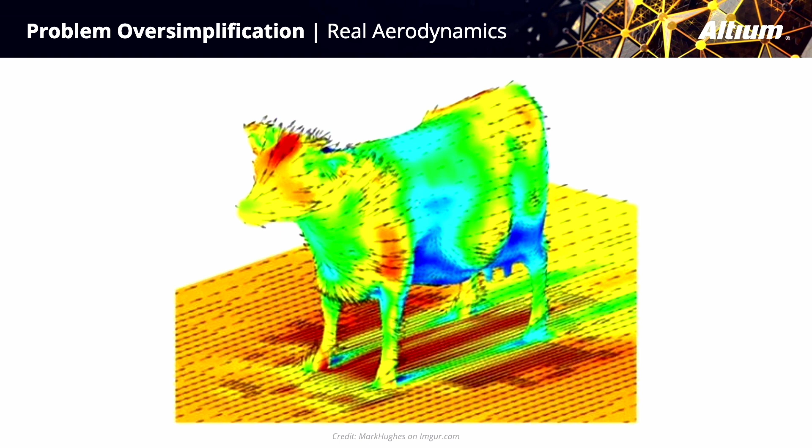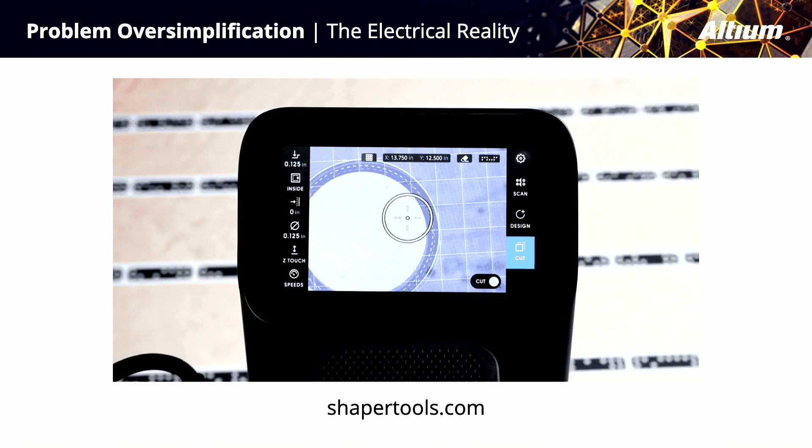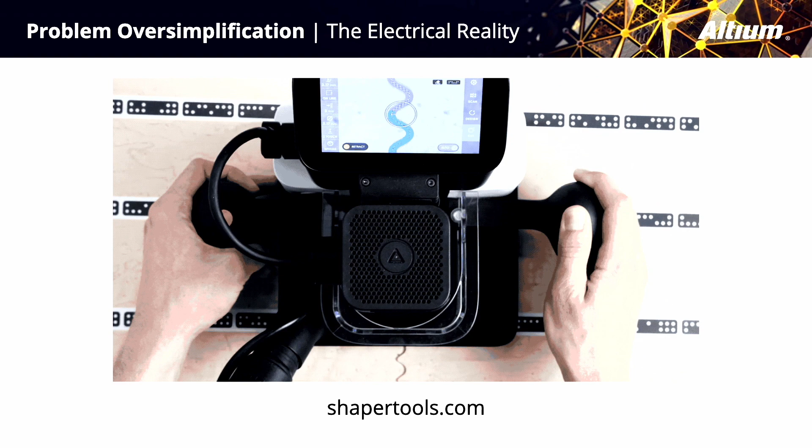So quick detour to explain what the hell Shaper Origin is, for those of you who don't know. Shaper Origin is a handheld rotary cutting tool, a robotic handheld power tool, that basically uses computer vision to augment your abilities as a human to cut something. You load in a digital design file. You do the coarse movements. The tool compensates for your movements in real time and keeps you on track on your design.

So if I want to cut a perfectly straight line and I'm moving like this, I'm exaggerating, but if I'm moving like this, the tool's spindle is moving in the exact opposite direction at the same speed to ensure that the resulting cut path is perfectly straight, giving you a machine quality cut with a handheld power tool. So I'll show a quick video of some of our customers using this tool, because I'm going to continue using Origin as an example of a holistically designed product from an electrical engineering perspective. So it's useful to have this context. And just because I'm really proud of it, and it's a really cool tool that people do really cool stuff with.

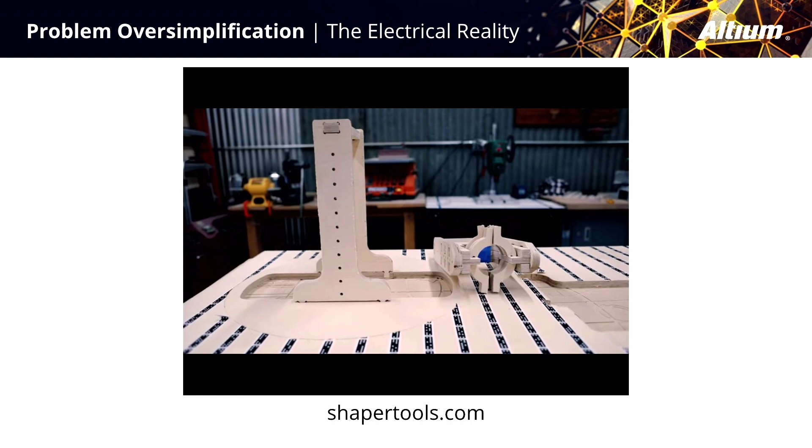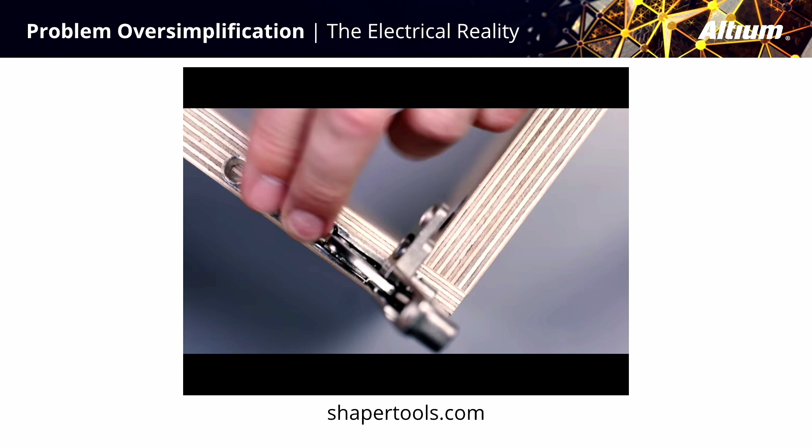So this product has taught me a lot about predicting issues before they happen, and developing an electronic design process that allows us, Shaper, to move quickly as a company. When we announced Origin at the end of 2016, saying we would ship it in a year, we did that. Unlike many other crowd-funded hardware products, we delivered on time in a tight timeline with a very complicated product. And our ability to do that was made possible largely by the things that I'll continue to discuss through the rest of this presentation.

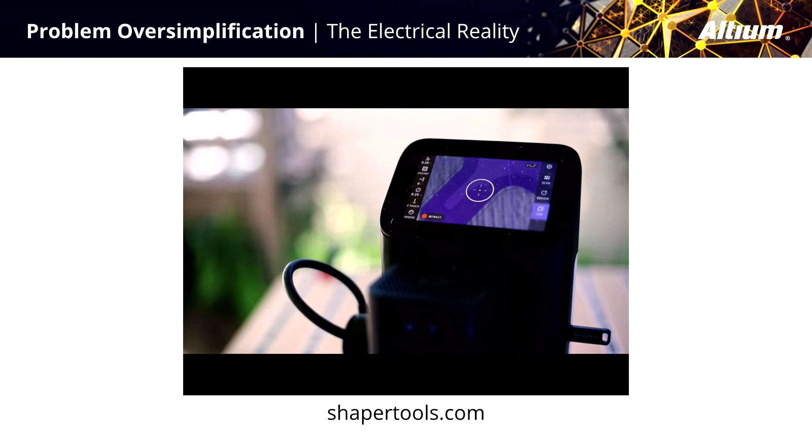So as of January of this year, Shaper has been acquired by TTS, which is parent company to Festool, a German company. How many of you have heard of Festool? Show of hands. OK. Great. It's a different answer that I get when I'm in the US, because their presence is not as large in the US. But we're really proud to be part of that family now. And we've actually already been working with them for years because they designed or co-designed the spindle motor that sits inside of Origin with us before that acquisition happened. So they bring decades of experience building really great power tools, and we bring experience with computer vision and software systems.

So, okay, we agree that designing PCBs is complicated. The simplified versions that we might use don't always address all the corner cases that we might encounter in the real world. So let's talk about designing them as part of a larger system. How do we know what trade-offs to make? What are the job functions that are tangential to us as electrical engineers, and how do those impact the decisions that we make as electrical engineers or PCB designers?

So for me, I kind of started to learn about the importance of these tangential roles that surrounded me in my engineering position when I was at Google. But this didn't completely happen to me until I was at Shaper, the 6th or 7th employee at the company. This was about 4 years ago now.

And the reality was, it wasn't that I had to learn how to work with software engineers or the people responsible for our manufacturing test or our factory fixtures or the people responsible for understanding how we were going to sell this to end customers. Those people didn't exist. So I was doing them, or my other 5 or 6 coworkers were doing them.

The industrial designer might say, hey, that perfect rectangular metal box actually has to be half plastic. The mechanical designer might say, this product has to survive sawdust. The person in charge of your factory programming fixtures might say, we have to be able to calibrate that system effectively. The person responsible for your end customer story and how you're going to market this product says it needs to work seamlessly with, in our case, ShaperHub, which is our cloud infrastructure. OK, so this thing needs to have wireless connectivity.

Cool. The person responsible for design for manufacture, design for test, design for assembly would say, we want to 100% test all the sub-assemblies so that when they get to final assembly, we already know that they're guaranteed to work. The person in charge of UI and UX design might say it needs to be beautiful and intuitive. Your embedded software team is going to say, we need to be able to debug this as we go. And when we get return units back from the field, we need to be able to get into them and understand what went wrong.

And your quality assurance people want to be able to measure the performance of the tool or whatever product it is that you're making and understand if it's working the way that you're marketing to your customers that it should be working.

So when I talk about PCBs in context, what I'm really talking about is understanding these roles that exist around you. And by the way, everyone else in your company has a similar diagram with them at the center of it. And it might be your job as someone who understands the holistic design process better than they might to encourage other people in your company to get an understanding of all these things that go around your job role so that they can have a better relationship with those people and understand their needs and requirements.

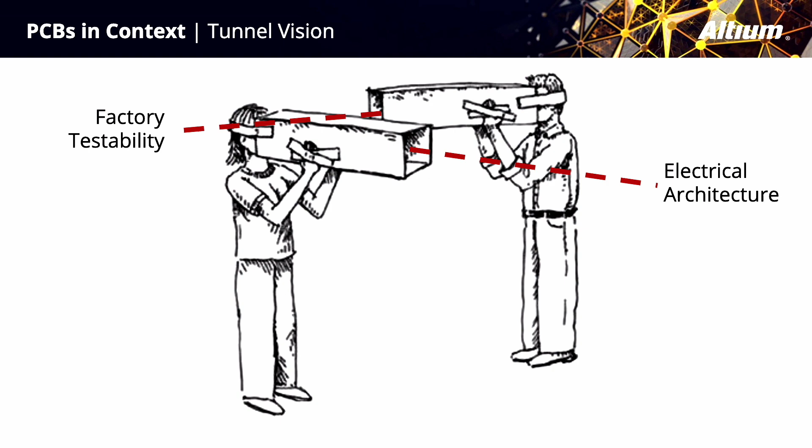So what happens when people over-focus, when they have this one-track mind, this tunnel vision, is they crisscross, and they end up in different places. And what happens is a year later, you end up with a product where the electrical engineer met his requirements for the product, the mechanical engineer met his requirements for the product, but guess what? Those two products are not compatible with each other, and now you can't ship this product. And so I call this tunnel vision, and basically it's you're getting so focused on your specific end goal that you're not considering the product as a whole.

So maybe you're thinking, it's not my responsibility. That's what the program manager is for, the product manager is for, to make sure all these different disparate needs stay on track, and that may be true to an extent. But I would posit to you that while you may have the best product manager or program manager in the world, they might not understand how a change in electrical architecture that you might make now could impact the way your factory fixtures are going to function 12 months from now. That's not in their job purview. They want to keep people on track, meeting deliverables, meeting timelines, and they may be very good at that. But you as an electrical engineer or a PCB designer should understand the roles around you and how the changes that you make are going to impact those roles.

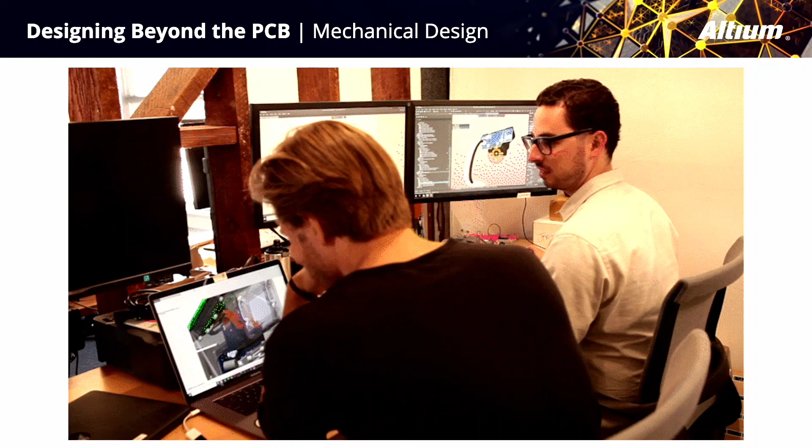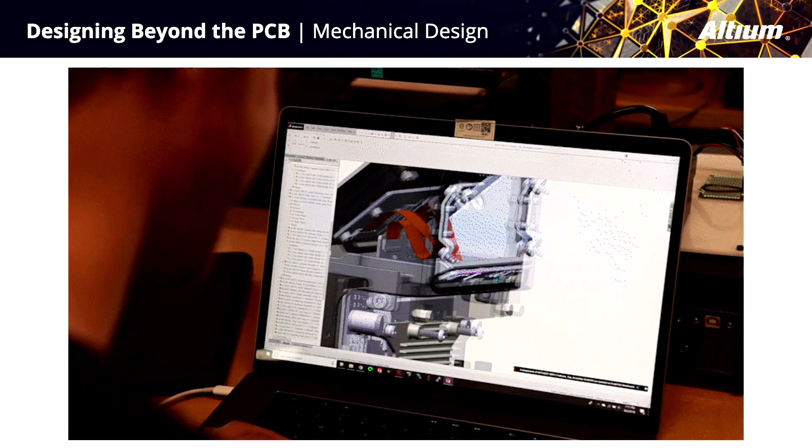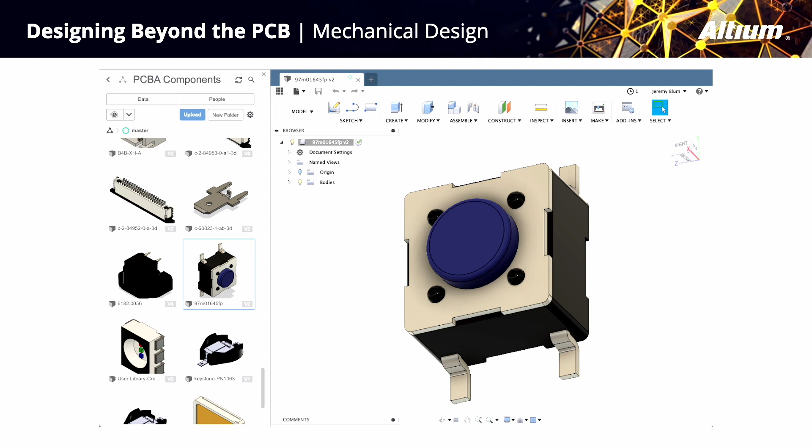Another important part of this process, I believe, is not saying you have to become a mechanical engineer, but understanding the things that impact their design process is incredibly useful. So this means a couple things. On one end of the spectrum, it can mean learning basic 3D CAD if you're not already familiar with some platform for doing that. I like to use Fusion 360 for modeling parts that I then import into Altium.

Just gives me a sense of kind of what their workflow looks like, even if I'm not doing the mainline mechanical engineering design of the whole product. It gives me a sense of what they go through in designing something.

The other part of that is understanding the processes and tolerances that impact them. So that means understanding when they say, we're going to extrude this part, or we're going to cast this part, or we're going to 3D print this part, or we're going to injection mold this part. What does that mean? What are the tolerances on those things? How does that impact your ability to design electronics that are going to necessarily need to interface with those mechanical systems?

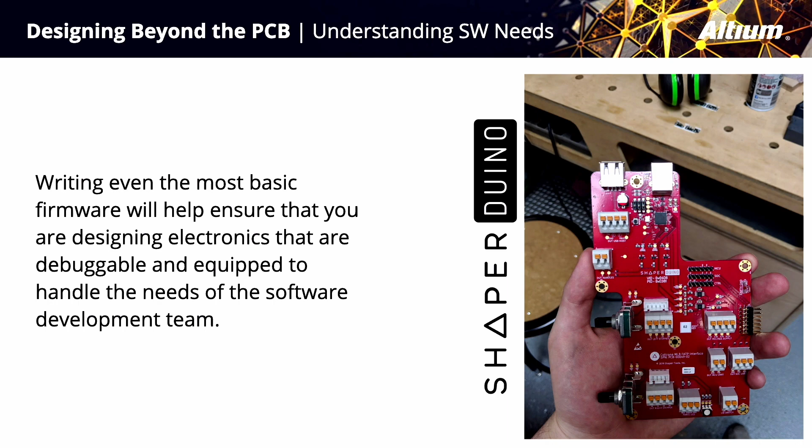The next thing that I'll use as an example is understanding the needs of the software team. So I'm biased here because I also manage the embedded software team at Shaper. But I do believe that our ability to make a tightly integrated product is predicated on the communication between our hardware and software team.

So show of hands, how many of you work on products where software eventually gets loaded onto something that you've made? OK. Actually, better question. Does anyone not? OK, I didn't think so. No one, right? Yeah, OK. So how many of you would say you're comfortable writing some software? OK, it's a pretty good show.

All right, that's great. So I'm not saying that you need to be writing the end production software that necessarily runs in your hardware. Maybe you are. Maybe that's part of your job description as we see a lot of these things meshing together more and more. And that's great. If you're not, what I would advocate is, and I think this accomplishes two tasks in one, get more involved in the test and bring-up procedures for your electronics.

In our case at Shaper, what I mean by that is we design most of our own factory test fixtures, all the things that do the final assembly tests of our sub-assemblies and the full product. A lot of those tests are relatively simple. We're taking basic measurements, things like that. And so we have this platform that I've put together called Shaperduino that we use internally, play on Arduino, where we basically use the Arduino software infrastructure, load it onto custom test electronics.

And it makes it really easy for our electrical engineers, and I can now say plural electrical engineers because we finally have another electrical engineer at Shaper, which is very exciting. It makes it easy for our electrical engineers to develop test software that is testing the electronics that they are also designing. And by designing the testers for your electronics, you are necessarily going to make testable electronics because you're responsible for both parts of that system. And so this goes back to that holistic design principle of understanding how all these things connect together.

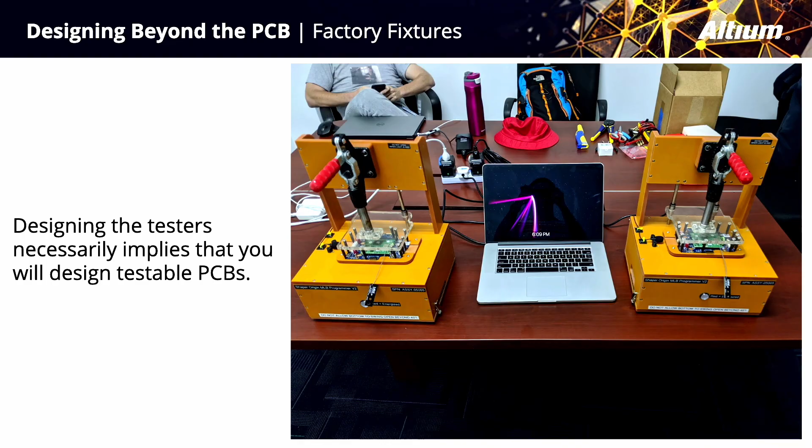So using this software platform, we do an array of automatic subassembly testers that are based on these electronics and Arduino-based software that's quick for us to spin up. But in many circumstances, I've found, and you've probably found too, that I don't necessarily have the bandwidth to design the electronics for the mainline product and also design the factory test fixtures and do the mechanics for the factory test fixtures. As much as I might find those things interesting, there's just not enough time in the day.

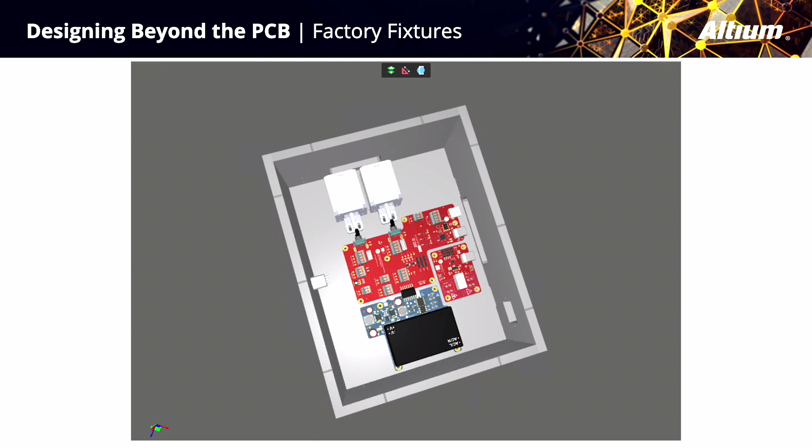So this comes back, again, to understanding the mechanical side of things a bit, getting a little more exposed to that, and using even some of the basic 3D modeling and assembly capabilities of Altium's multi-board feature I now use. I'll bring in solid bodies for parts of a fixture, communicating with my fixture vendor or my final assembly site or my SMT site that might be using this fixture, bring that in, generate a rough 3D model. This is a rough 3D model of how my boards need to mount in there in order to function correctly.

And then I ship this off to whatever vendor on whatever continent is making the final fixture. And I say, here's what it needs to look like. Here's how these things need to connect together. I haven't done the full mechanical design, but I know enough about the mechanical design to make sure it's going to work the first time.

Maybe this product is being delivered to end customers like our product is. Maybe it's for internal use at your company, or it's for a limited subset of people in the world. But they have some set of requirements that product needs to meet. And you get those as technical requirements. You know, this product needs to run on 24 volts. This product needs to operate for this amount of time, whatever it is. And if you don't understand the customer stories that went into developing those requirements, then it's harder for you to make intelligent decisions about how to execute on those.

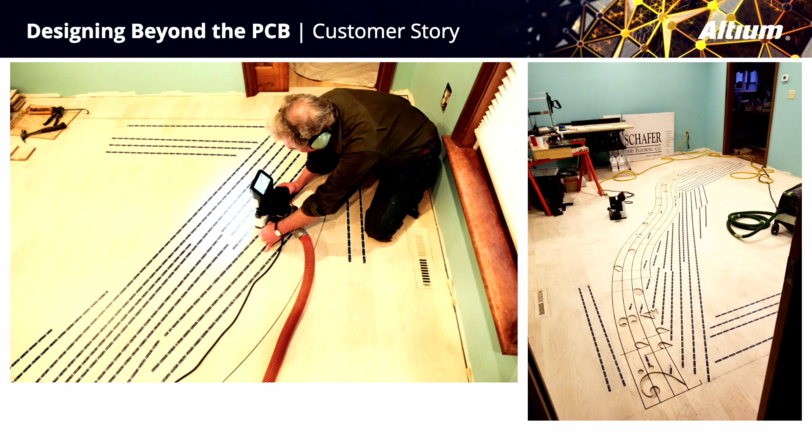But the general idea here is our marketing team, I say team, but it's basically one person, went out to some of our prospective customers, tried to understand from them what are the ways you want to use our product? What are some of the things you want to do today that a product does not exist for allowing you to do. And this is a project that this guy wanted to do for years and simply had no feasible way of executing it. He has now done it with Origin.

But this kind of customer requirement about wanting to do a large working space, in this case it's indoors, but potentially also working outdoors, having to work on the floor, not necessarily on a work table, these are all things that fed back to me. They might not normally feed back to an electrical engineer, but I heard directly not just about the technical requirements that these marketing or customer stories researchers believed were dictated by the customer stories, but the customer stories themselves. How do they want to use the tool? And so that feeds into making decisions that impact the electrical architecture.

How do we position the handles in a reasonable way so that they're ergonomic when they're on the floor versus when you're on the table? Might seem like a mechanical problem, also has an impact on the wiring and the electrical harnesses. How do we tilt the screen so that it's at a reasonable angle for using it on the floor, or using it outside in high glare has an impact on how we source that screen, how bright it is. These are all things that then feed back to how much power does this unit need to have, how much brightness does the backlight need to have. So these are all things that come back to me.

And if I had just been told the thing needs to have a 5-inch screen, the thing needs to have handles, we might not have developed a product that allowed people to work in these sorts of situations. So if you listen to that feedback, it enables you to build the electronics in a way that you're going to end up with a better end product for your customers. And in case it's not really clear from looking at this photo, these are all individual inlaid pieces of wood. So the elements are cut out into the floor. He cuts out matching elements, and they slot in perfectly.

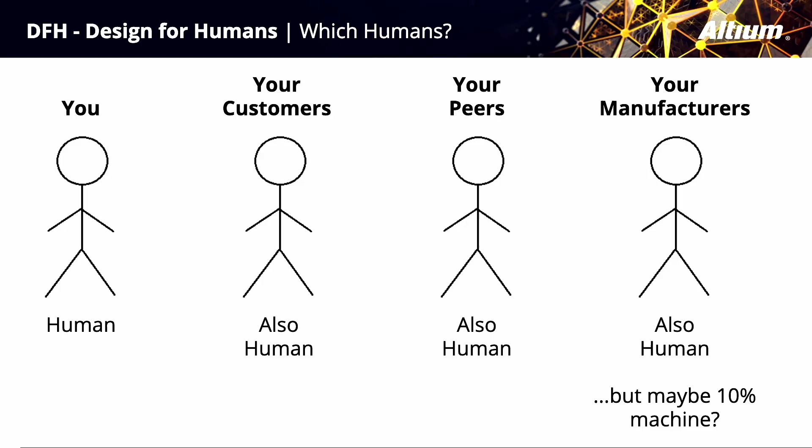The last group is your manufacturers. So they're also human, contrary to popular belief sometimes. There's a tendency to treat manufacturers like they are the machines that they operate. They are humans. But we think of them as input-output machines, right? If we give them the right input, they will produce the same output every time. Has that always been everyone's experience? No, yeah, OK, I didn't think so.

However, if you give them enough documentation, I would even go so far as to say over-document, certainly as opposed to under-document, you're giving them the tools they need to succeed and succeed repeatedly and reliably. And this is particularly important if you're ever working on a design where you think this might go to another manufacturer at some point. So let's dive into each of these with some examples.

So designing for humans, designing for you. I mentioned this is about making reasonable notes to yourself, making it stupidly easy for you to understand what you were thinking when you did something. This is a very simple example. This is an excerpt from a board that we use in our factory as part of an automated assembly process. It just needs to drive a stepper motor.

Really, really simple. When I was designing it, I knew I only had enough time to do one spin of the board before we were going to hit our manufacturing deadline and needed to start using it in the factory to build stuff. And we weren't sure exactly how we were going to use this yet. The software wasn't written yet. I didn't know what micro-stepping mode I wanted to drive the stepper motor in.

For those of you who are not familiar with stepper motors, it's basically how many clicks you get driven from the stepper motor driver as it does its rotation. And you're trading off torque for the number of ticks that you get around. And so I made a reasonable guess. I defaulted it to 1/8 micro-stepping. But I put in solder jumpers, so you can see that documented in the schematic here, but also on the board down the bottom here.

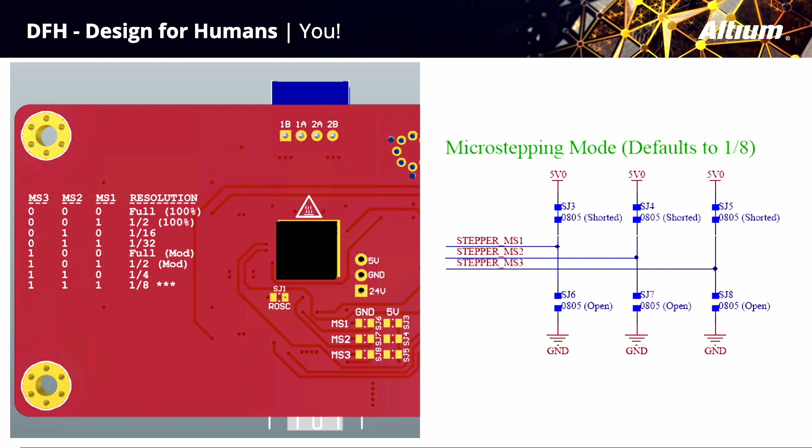And made it easy for me, if I end up being wrong. We didn't have enough GPIOs to drive these stepper mode select pins directly. They need to be hard set on the board. I could cut those and resolder them and adjust them. And since I knew I was going to be on the ground at the factory doing this, and for those of you who have spent time in a factory, maybe you don't always have the best internet connection. Maybe you can't connect to your VPN and get your design files. I've had every number of things go wrong there.

I just put the information I needed right on the silk screen. This is a factory board. I don't care how much information I put on here. And so if I need to modify it, I ended up not needing to modify it, but if I did need to modify it, all I had to do was look at this and cut the right jumpers and adjust things accordingly. And so that was a documentation process for myself

that had the potential to save me considerable time, and very, very valuable time in this instance, because we were on a short time crunch. And this board was required as part of the assembly process of our product. And if I didn't have this documentation, the ability to change it, then we might not have hit certain timelines, and time is money when it comes to manufacturing.

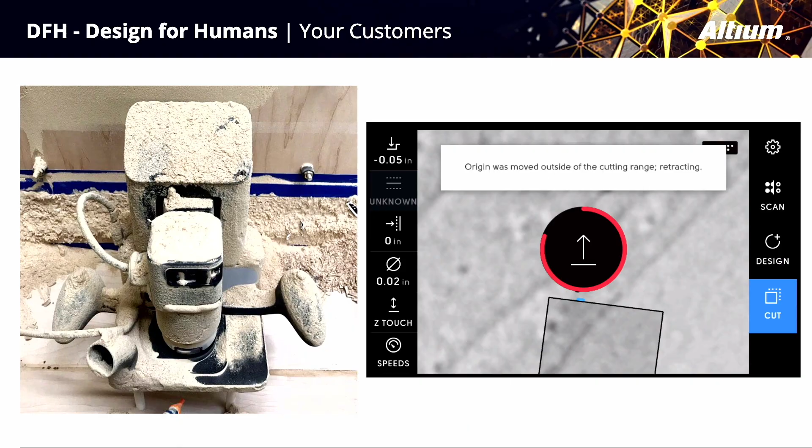Next example is designing for your customers. So I mentioned earlier about understanding the environment that your customers are going to operate in and making smart design decisions early. In our case, there's a couple things for us to consider. On the left, you'll see some of our testing for dust incursion into the tool and how the tool survives a situation like that. It does, spoiler. And the other thing is how we handle error states.

So I briefly mentioned earlier building in the functionality into your product so that it can self-diagnose to the greatest extent possible. And there are trade-offs here in terms of cost, in terms of complexity, and you have to make those trade-offs. But when feasible, if you have the sensors that enable it, we can give useful and meaningful feedback to our very human operators to help them take corrective action in a way that they ideally, in our case, don't have to call customer support, but it's very clear what happened.

So in the case of Origin, it has a certain cutting range. If you move it out of the range, it retracts. But it tells you and it explains why it retracts. And there's many other error states for different ways you can conceivably cause an issue. And we populate that information up to the user, and we have the sensors built into the electronics to capture that information and display it in a meaningful way.

And even if, from a cost perspective, it doesn't necessarily make sense to include those things in the end product, it doesn't mean you can't include them in the prototyping phases and use it to understand what the potential failure modes are.

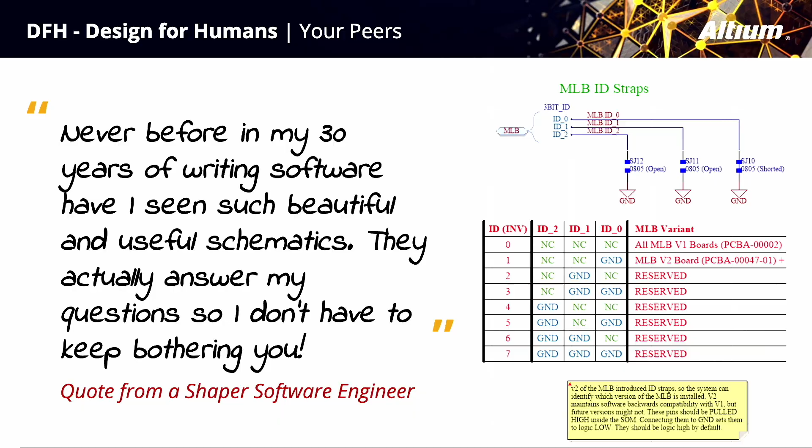Next one is your peers. So this is a quote from one of my coworkers that I'm very proud of. And I make very, very verbose schematics. I mentioned earlier I've made enough mistakes or had enough problems where I look at a schematic a year later and I don't remember why I did something or why I picked that resistor value. So I document all of it, like a lot.

And I put in all the information that's required for an embedded software engineer working on, let's say I have a board with a microcontroller on it, to understand how they need to set up that chip. Which IOs need to be inputs versus outputs, which ones need to have a certain drive strength. Do we anticipate needing to have spread spectrum driving on this clock line for noise reasons? All that information goes in there, and then they can parse that information out themselves and look at the documentation themselves and make decisions, ideally, in my world, without having to come over and ask me those questions.

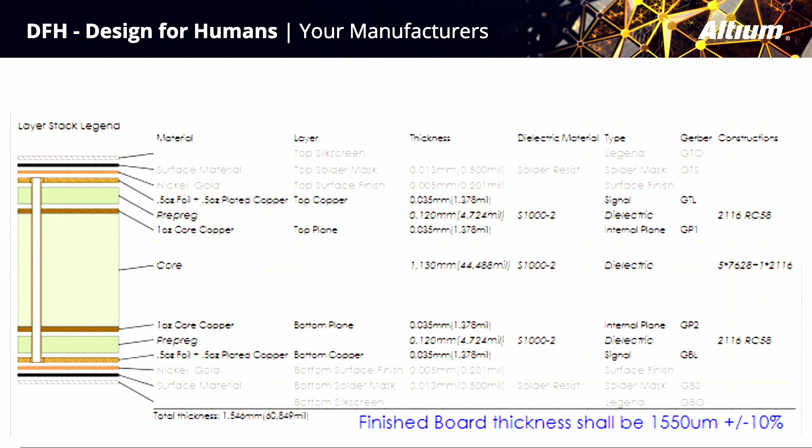And then the last one, coming back to it, is your manufacturers. So in the case of your manufacturers, writing good documentation and requirements early is going to save you more time later. Judy describes this to me as slowing down to speed up, taking more time earlier on in the design process to document things properly so that later in the design process, you are not running into problems because there was a miscommunication of things. And so this comes in many forms.

In my case, I do use the Draftsman functionality in Altium quite heavily. I use the stack-up functionality. By the way, for the Altium folks in the room, I have some feedback for ways the stack-up can be further improved in the Draftsman drawing, but it's really good where it is right now. And communicating that information to your, in this case, fabricator early, communicating with them about what the stack-up's going to be early, and being pedantic in how you call things out.

So, for example, when I'm defining my outer copper, I'll say, not just the finished copper, not just the foil copper, but I expect it to be this thickness of original foil and this amount of plated. And I get that information and coordinate that information with the fabricator first and make sure we're in agreement on that. And then that information is what goes into the build documentation. A really important part of that for me is not allowing them to change things that don't get reflected in the documentation.

And this is a thing that is really tempting to not do properly because it takes a lot of time. So classic example, you send a design off to a fabricator. They say, hey, some of these traces, we can't make that thin, or we can't handle this spacing, or based on the dielectric we're using, we need to change the width and spacing of these controlled impedance lines. And they can say, hey, we'll just change that in the Gerbers for you. And you can say, yeah, do that. And they will happily do it. And you'll be on your merry way, and those boards will come out, and they'll work great.

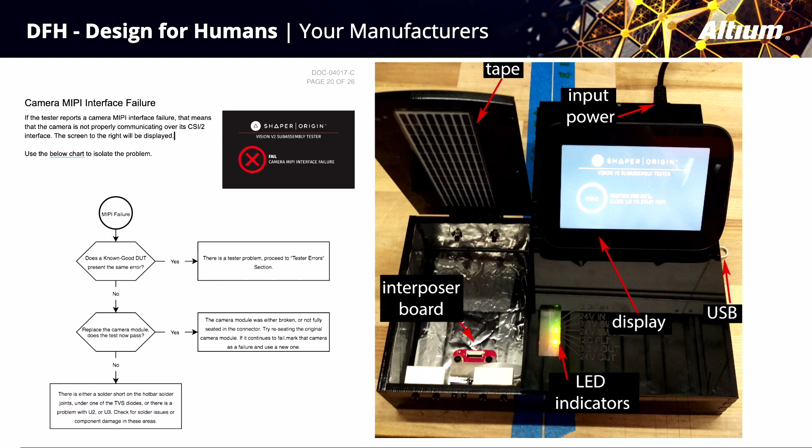Another part of this is how you design and document your testing systems for your manufacturers. Do you just say, hey, here's this board, it's got these voltage rails, make sure they're at this value, have a good time? Or are you more explicit about, I need you to test this, this, and this thing, they need to be in this error range, I need you to be able to push this data to our server or save the logs to us in some capacity, track it against the serial number.

There's a big difference between just saying, functionally test this board, and saying, here's how you need to functionally test this board. And that involves writing additional documentation. Sometimes it means designing that functional tester yourself if this is a board that's sophisticated enough to require functional testing.

Because not that you can't trust your manufacturer to do it, but again, going back to something we discussed earlier, if you are co-designing the electronics and the things that test those electronics, you're going to necessarily make testable electronics, and you're going to necessarily make a tester that can test those electronics effectively.

As opposed to doing this feedback loop process with your manufacturer where you make a board, you say test this, 3 months later they're like, hey, we're ready to test this board, but you don't have the right test points on there for us to do these things. And then you end up saying, fine, I waive those tests because you're already behind deadline, and now you're shipping that board without the proper testing, and it fails in the field or something.

So this is about giving your manufacturer the documentation and the tools that they need. So the example in this slide is a functional tester for our vision assembly. As they assemble the camera to our vision board with our illumination LEDs and our flex, they pop it in here. It runs a series of tests automatically, and it uploads the results.

Don't underestimate the importance of pretty pictures. Even if you're using MS Paint, a picture is worth 1,000 words, and sending an image describing how you want something to be set up is infinitely better than doing it in an email. Ideally, doing it in some sort of version-controlled document explaining how something is to be built is the best scenario.

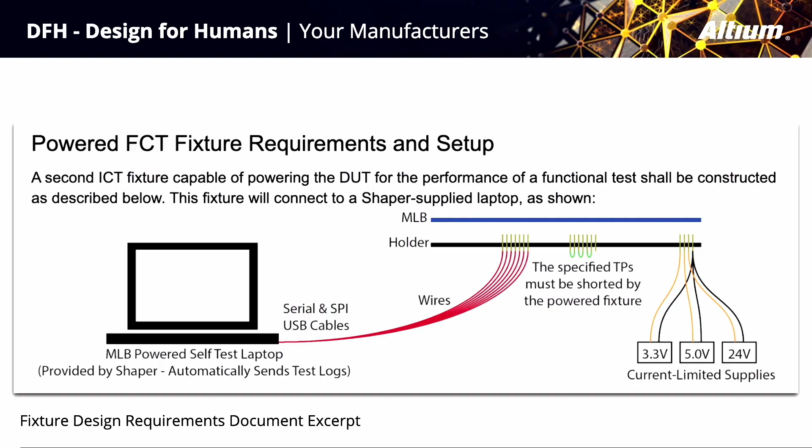That information should go along with your release documentation for your fabrication and your assembly drawings. Say, here's how you fabricate it, here's how you assemble it, and now here's exactly how you test it, the things I expect to be tested, how I expect them to be tested, and if you're providing the tester, how to operate that tester.

This also has a huge benefit of doing a really good job of overcoming language barriers. I'm sure a lot of you work with manufacturers whose first language is not the same as your first language. And no problem there. That's fine. I'm sure they're still really, really good at what they do. But the reality is that language communication issues happen, and pictures are really clear.

So that's PCBs in context, using that information to design it beyond the PCB, and then pairing that with documentation that makes it easier for you to understand what you did, makes it easier for your peers to understand what you did, makes it easier for your manufacturers to implement what you did, and ensures happy end customers for your product because your product works the way it's supposed to, and because they get feedback and understand when the product is not working the way it's supposed to.

So let's review. PCB and electronics design rules of thumb result from the simplification of complex problems. This is the black box problem that we talked about. Rules of thumb are great until they're not. And I'm sure that all of you have met situations where they are not.

So when we oversimplify, when we exclusively follow rules of thumb without understanding the context in which those rules of thumb have to exist, we lose sight of the context that our electronics operate in. If you better understand the constraints that impact the other parts of the larger product, you will make better design decisions in the PCB that will increase its likelihood of performing the way you want it to.

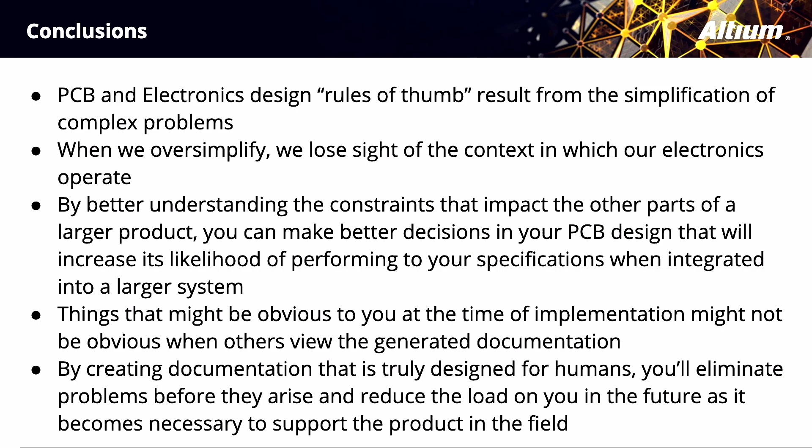So how many of you want your job to be easier? OK, write good documentation. Done. You can pay me later.